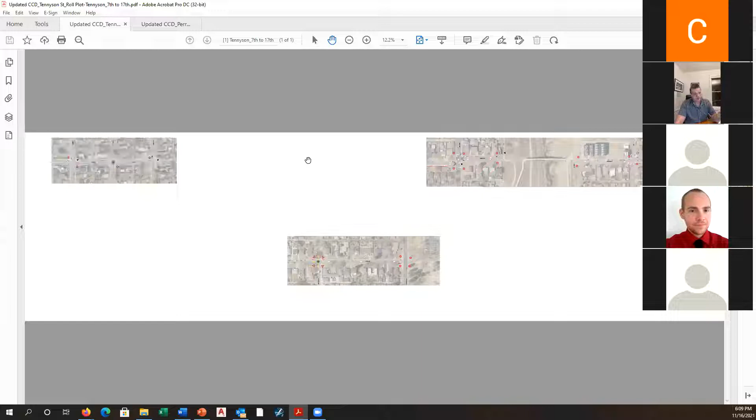Okay, good. So what I'm pulling up here, this PDF takes a little while to render, but this is what we call a roll plot. So this will show at this level the whole corridor all the way from 7th all the way up. It's a little confusing at this level, but I'm going to zoom in and maybe start at 7th and work our way up.

You'll see these also on the Konveio site, you'll see this exact information, these exact files.

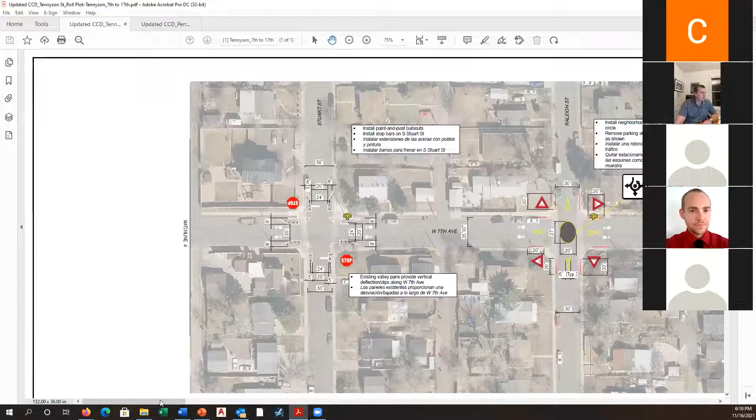So what you're looking at here is 7th Avenue, between Perry and Tennyson, Stuart, Raleigh, and Quitman. This is the neighborhood bikeway piece that we talked about in the presentation, showing how we're intending to make speeds go slower. We have a neighborhood traffic circle shown being installed at Raleigh.

We have paint and post bulb outs, that's what you're seeing with these. Those little black dots are the vertical posts. And we also have, if you've ever driven this, what we call valley pans, the drainage items at the intersections, which are also kind of steep. We think that provides slowing too.

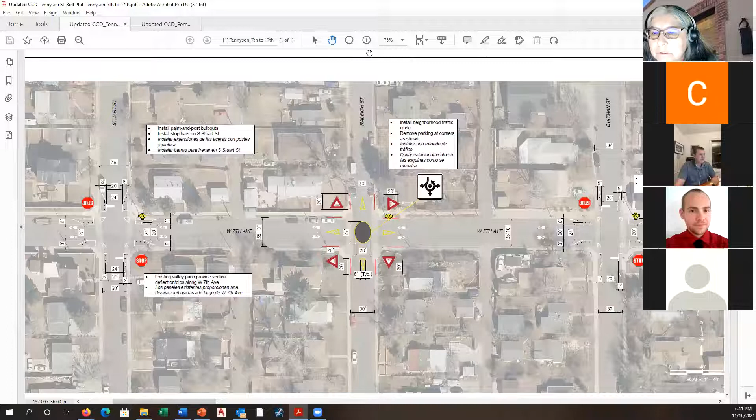Mrs. Sandoval, I see your hand up. Yeah, thanks. I was looking at that 7th and Raleigh where I'm located at, and I was wondering how large is that roundabout and what does it look like? I mean, you only have sort of the drawing on the right.

Konveio, the online Konveio, right. So I don't know what that means. It looks like a pretty good chunk of the intersection would be taken up. So what happens next?

I'll give you a high level answer. So we show the dimensions here, how wide and long those are, and the street dimensions. Those dimensions are set based on some engineering design guidance about how to slow speeds while still allowing Denver fire trucks and single unit trucks to make these turns. So from looking from the air down, that's how those are set up so that cars have to slow down, but Denver fire can still make those movements.

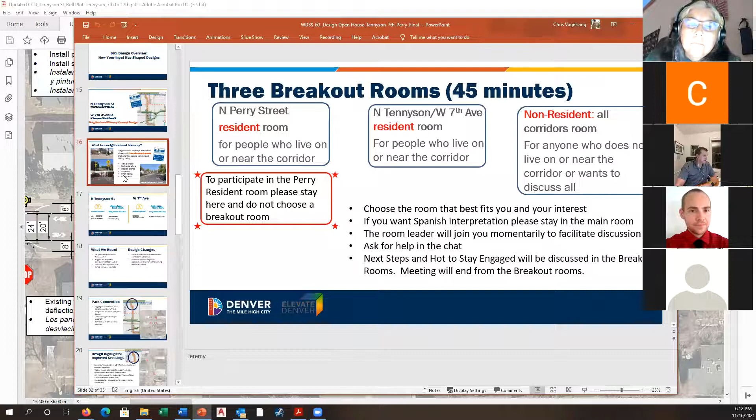And in terms of what it looks like, I think back in our presentation there was a photo. So I'll just pull this up. Right here, you can kind of see how they've been implemented so far. They're really like striping, and then these black, rubberized curb items with some signing in the middle. That's how it's been implemented so far, and that would be what we'd expect.

Are there any opportunities for any kind of landscaping features? Great question, some cities have done that. The issue in Denver is we don't get a ton of rain, and so that's a maintenance issue. I think the intent is to start with the basic traffic circle elements, make sure they work, that they're accepted by the neighbors, that there aren't any issues. Then the next step would be, can we make these more permanent? Can we do different things? That would be when the landscaping piece would come into play, Kathy.

I have seen them in other suburbs with the same amount of rain that we get here, so I was just curious. Yeah, great. And the other thing I wanted to bring up, we're talking about a phased implementation. One of the points of this program is to get a lot of things done quickly and less expensively, and then see how they work, adapt and adjust, and then make them more permanent, like more concrete items at a later date.

So I just had one more follow-up question. Also, I noticed on 7th and Raleigh where the fire hydrant is, there are people parking adjacent to it, and I gather that the red lines are to be not-parking areas. That's correct. And already where this red car is, I'm already crimped down from the sight triangle, and this is just adding to it. So I'm wondering if that can be shortened in any way so that we have parking.

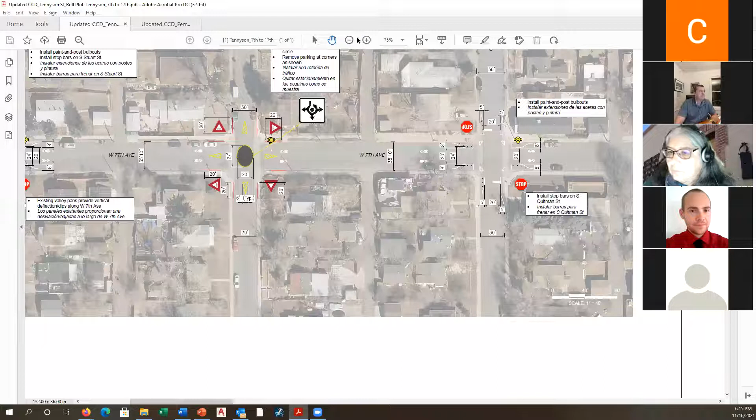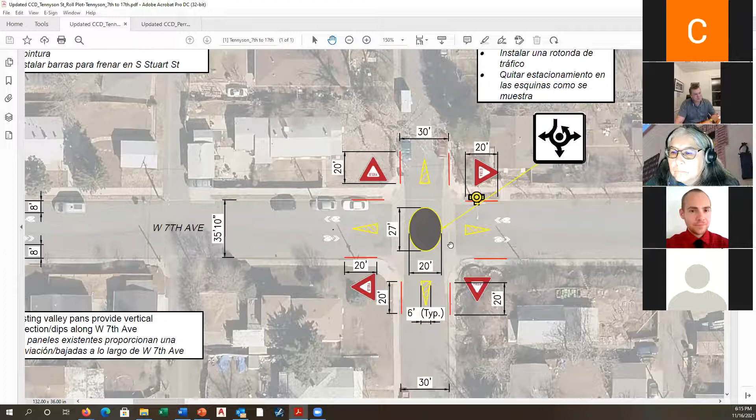Since those are pretty aggressive, I can only imagine how that would feel in a car, making those sharp turns and dipping into those valley pans, dipping out of them to try to make a turn, especially a left-hand turn. Yeah, that's a great point. So it's a lot of adverse slope, right? You're changing slope as you go across. I honestly don't know if the design team that's taking this has thought of that. We'll make the comment about that and make sure that gets paid attention to and make sure that works. Okay, cool. Thank you for pointing that out.

I saw a car just this morning, two of them back to back, throwing sparks through those valley pans. Oh, really? Yeah, so it happens. They're pretty deep. Yeah, they are deep, which is good for slowing speeds and kind of bad for hitting the bottom of your car, right?

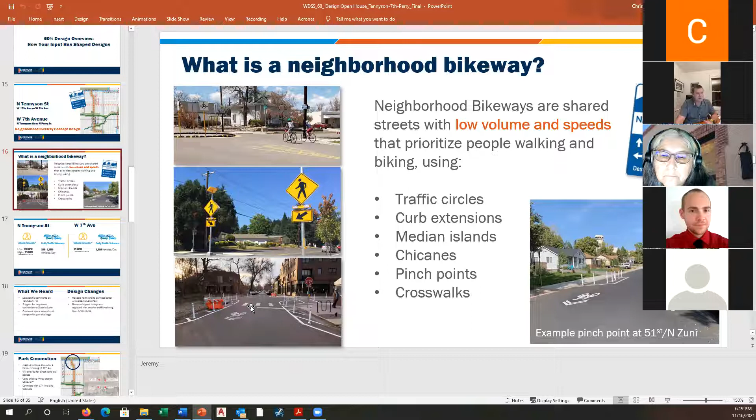Continuing with that theme, there is parking on the west side of Perry Street. We have a 30-foot curb to curb width - that's from face of curb to face of curb. Right now there is parking allowed on the west side of Perry. But in this design, to make everything fit, parking is removed along Perry between 7th and 6th. It's not impacted north of 7th - everything stays how it is today.

Have you received any comments about that from the residents? No, we didn't get a ton of comments about that in the last round. We'll try to make sure the Perry main room folks are talking about all this stuff too, and hopefully residents who live here will give input.

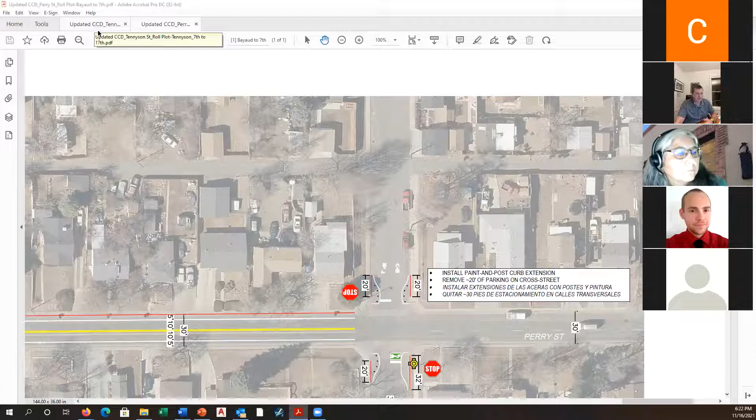Please, I think that's one of the main things I want to get across to people - please go there and take a look in the details. The comments you're giving me right now are really good, they're super detailed. That's exactly what we're looking for.

So I'm going to start moving north and start talking about Tennyson, starting at 7th and Tennyson. Sorry about that - so again, on your screen, north is to the right. So all the light rail and everything is on the right edge, heading to the right, and 6th Avenue is to the left. So sometimes I can get disoriented.

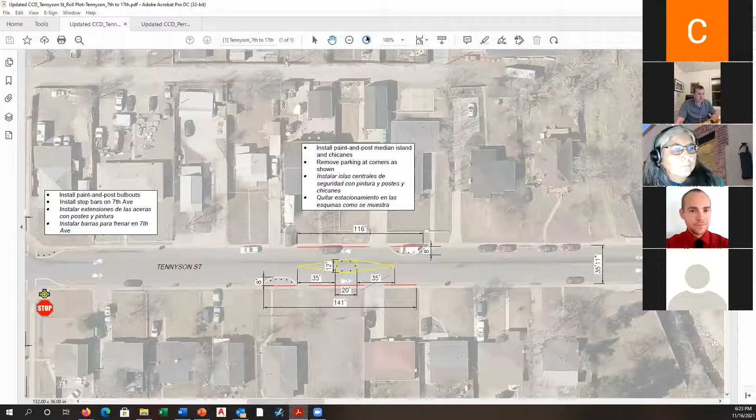On Tennyson Street, we had speeds that were a little higher than we'd like. We're trying to get those speeds down, so we've implemented traffic calming measures called chicanes. I'm going to zoom in so you can see. To Kathy's point before, the red lines show where parking would be prohibited. There are pieces of Tennyson where parking is removed to install these traffic calming elements, so cars have to make an S maneuver, or a C, which slows their speeds down.

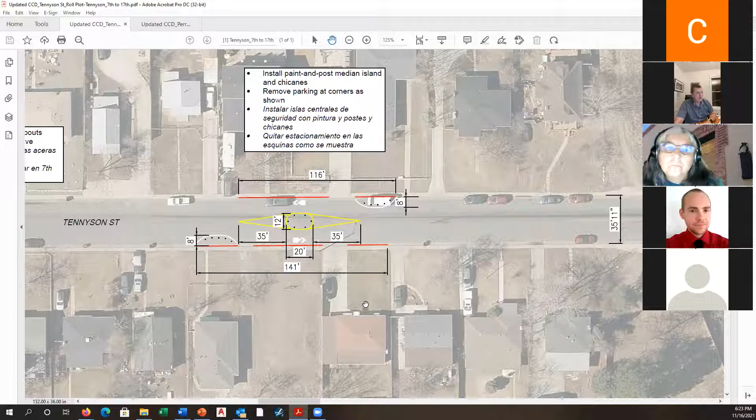We were proposing to install a few of these. This is one of the locations, and we tried to set them up so they wouldn't block driveways - so we wouldn't have the medians in front of driveways and the chicane elements. As people go and look through those, please give us any detailed comments if we've missed something there.

At the Lakewood Gulch Trail crossing, there's a crossing where the trail goes across today, but there aren't any markings or anything. So we're proposing a paint-and-post median island, marked crosswalk, and yield lines to really define that space and make that crossing safer.

Oh, I'm sorry - hey, by the way, if I don't see you, just go ahead and speak up, Jonathan. Sorry. I only raised my hand like 3 seconds before you called on me. Okay, alright, so it wasn't a wait.

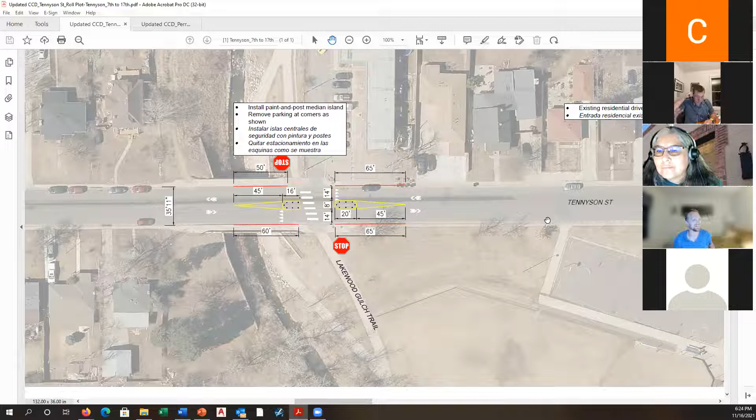Hey, just wanted to say these chicanes are great, I'd love to see this kind of work here. I'm wondering - this relates to my comment on the last one too about the traffic circle - I'm now interpreting that the little black dots on the screen represent some sort of vertical element, like a flex post, something along those lines. Yeah, that's right.

Wondering about these chicanes, and particularly the traffic circles on the other one - I didn't realize until we walked through one of those diagrams that the traffic circle painted triangles don't include any flex posts. What I'm seeing on these chicanes is only flex posts in the center circle instead of anything nearer to the points of the chicane.

What we're seeing on the 35th Avenue bikeway is that just the paint on the ground in the approach to the traffic circles is not changing any vehicular behavior as to how they approach and enter it. They'll stay mid-road and take a wider turn. Wondering if we could add some flex posts to those incoming triangles for the traffic circle, and maybe some flex posts nearer to the points of these chicanes, so that people don't just blow over the part that's supposed to be the narrowing effect.

Okay, yeah, great comment. Sounds like you guys have had some recent experience watching operations of ones you've installed. So yeah, we'll take that comment down and take a look at that.

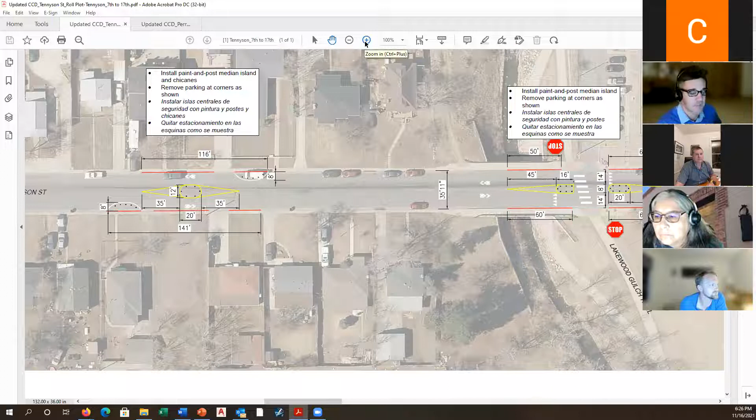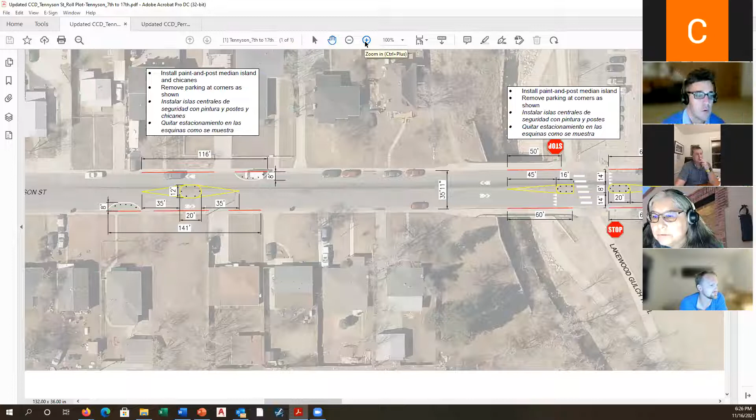And Chris, one quick thing. Sure, Jeremy, again great comment. I think it really does come down to discussion and coordination with Denver Fire, making sure that if this is a prioritized route for one of their stations, they can actually physically get through and aren't popping off the flex posts every time. But something we can definitely explore and look at the geometry. Good comment - this is one of the few through streets that go across the gulch, Tennyson and Perry, so it's important to have those clear.

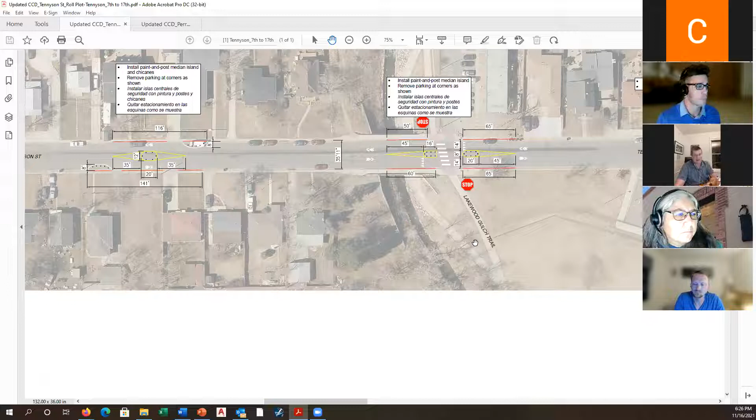Yeah, across Lakewood, the Gulch, yes. Okay, that's a great point, Jeremy. We are coordinating with Denver Fire. That was a comment we had at the last meeting about making sure response times weren't impacted and that they could get where they need to go to save lives. So definitely on board with that.

Okay, so I'll just kind of keep going north. So at this intersection, this is set up this way with all-way stops today and marked crosswalks.

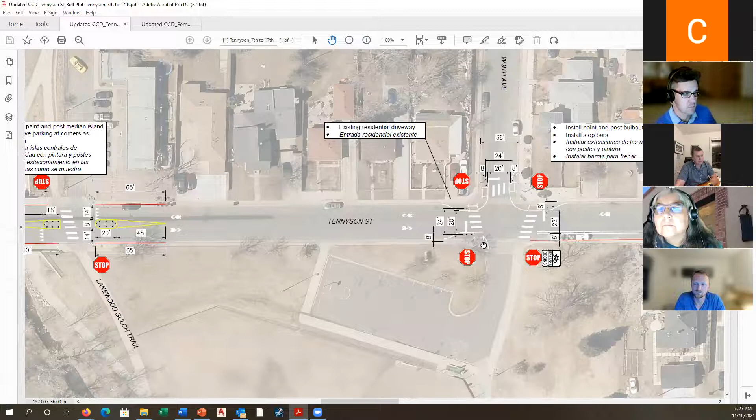We are proposing to do curb bulb outs. You'll see that, to Jonathan's point before about the raised - the black dots representing raised posts - when you look at some of these, they won't have the black dots in certain places. That's not a rendering error or a mistake, that's on purpose. The design team is running - they look at, in the computer, Denver Fire vehicles and certain vehicles like that, and make sure they can make the turn without hitting the posts. If they can't make the turn, then the posts get removed, but the striping stays in place.

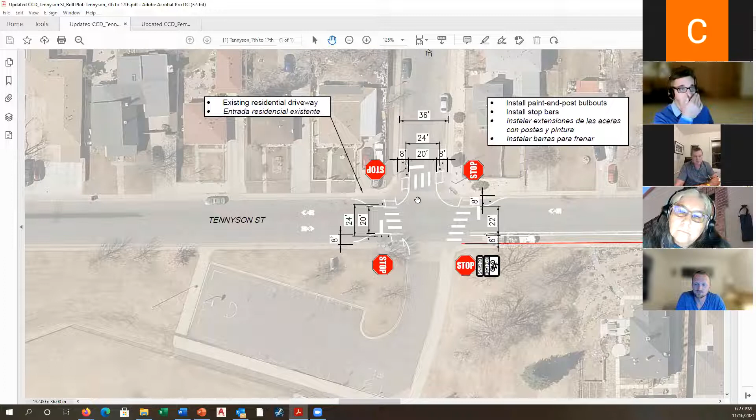So kind of to Jeremy's point last time, they're looking at that level of detail at each intersection.

Okay, now here is this intersection - go ahead. At this intersection, I have a concern about the stop signs for going north and south. From experience living in this neighborhood, any bicycles that go down that hill blow through that intersection. I'm concerned if traffic on 9th is expecting a vehicle to stop, there might be an issue with that bicycle coming through the intersection. If we were to remove the north and south facing stop signs, at least it'd be the expectation that anything coming down 9th would look first.

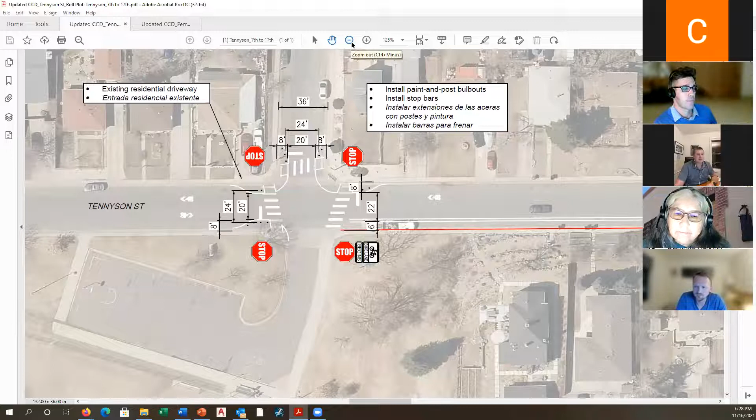Okay, I disagree - yeah, I think Kathy... it needs to have a stop sign. Man, that's a really steep grade, and if people don't stop there, they're just going to continue to go faster without a stop sign. At least it helps break the speed up a bit, and I think that's real important.

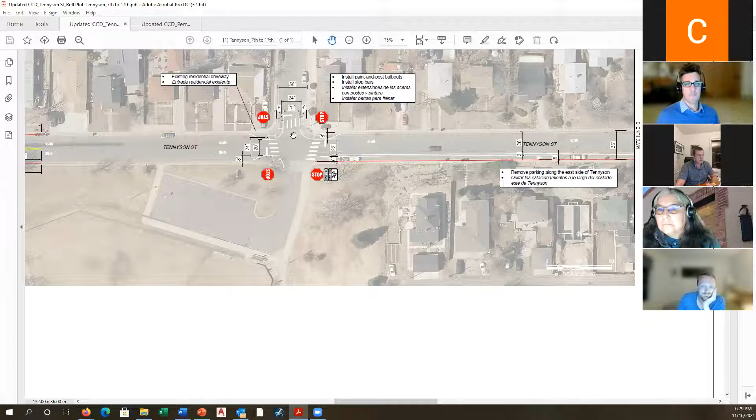Right, so I get that in terms of the bikes blowing through that - I'm sure they do because they don't want to slow down going downhill. But to Kathy's point, the reason this was implemented the way it is now is Denver's Safe Routes to School program, and they do all-way stops and marked crosswalks at those places. So that's the reason it's there, and we're trying to make it a little more obvious that you have to stop there by putting the curb bulb outs in and doing some things.

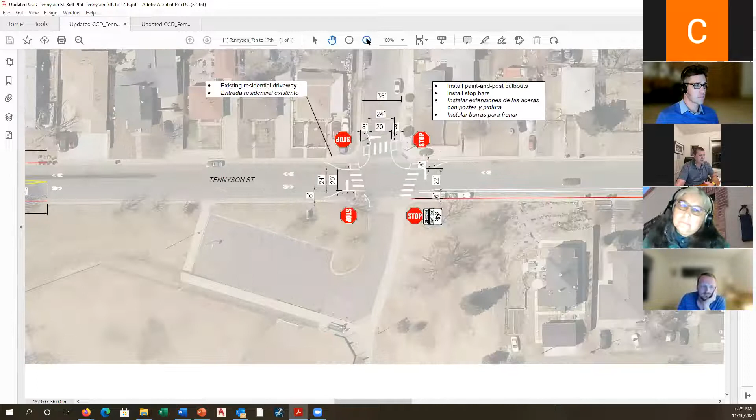But we'll take another look. Kathy, I think you make a great point - that's why it was designed the way it is today.

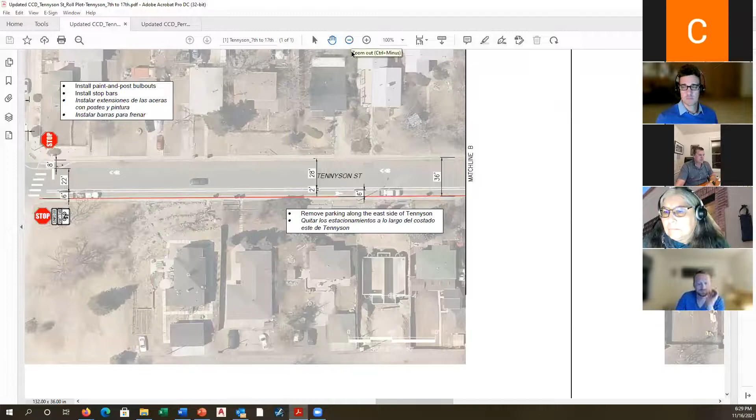This part I really want to highlight. I'm going to zoom out a little bit so we can see the extent of it. Geneva mentioned it in the presentation, and I'll go over the northern half of this. But basically, we looked at the speeds here and the grades, so you can't really tell.

You can't tell from the aerial, but where my hand is now is low, and this goes uphill to the north, and it gets really high. This is really steep. I think when I go downhill on this on my bike, I hit like 30. I go pretty fast.

What people were worried about is going uphill, when you're going up you're going like 8, 9, or 10 miles an hour, and they're worried about car interactions and speed. So we looked at this, looked at the topography, looked at the data, and changed this design to include an uphill bicycle lane heading north towards the light rail.

What that means is that parking on the east side of the street would all be removed. So we did do some parking studies here. I think 30% of these spaces were utilized, so it wasn't like zero. So there will be some impacts there.

If you're on this call and live on the block between 9th and 10th, I'd love to hear your thoughts on that. Is there anyone here? Okay, well, we'll make sure we reach out to folks and try to get folks that live on this block so they know what we're proposing and what's coming, because we don't want people to be surprised.

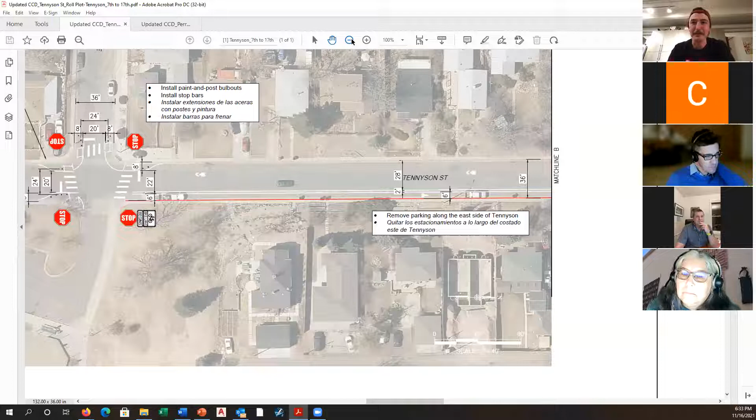Yes, good point. Andrew? I just want to say I love it. I'm really grateful. I oftentimes get off my bike and walk at times on really steep hills if I get nervous about cars, and I always feel really embarrassed, like I don't want to go do that same route again because I've held up somebody. So I'm really glad to be able to go up this street and not hold anybody up by going really slowly on my bike. I was just really grateful to see this change and wanted to say big heart love on that change.

Thanks for the input, Andrew. So yeah, if you live on the street, you might not be as excited about it. If you use it, definitely it's an improvement.

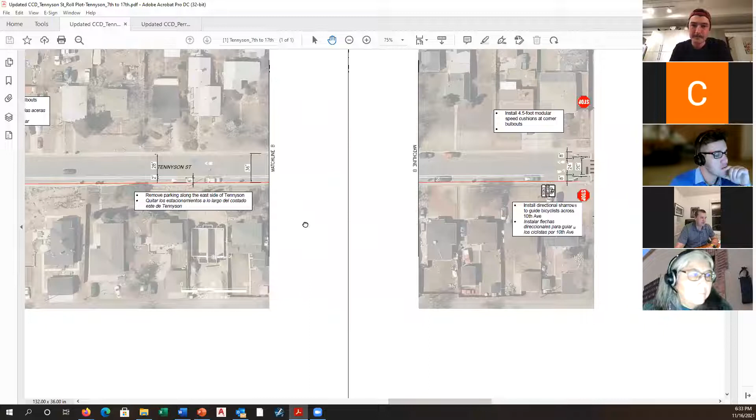I'm gonna go, we just have these kind of broken because of the way we wanted to show them on the internet, but I'm gonna go up a little further and hopefully this will load up. There we go. Okay, so that little line was kind of half the block. This is the north half of that same uphill climbing bike lane, and this is the intersection with 10th.

Some changes here to try to get speeds down, get the turning speeds down, make this safer for pedestrians and a little easier for the bikes to make these sort of offset intersection moves. I'll zoom in a little, I see people kind of squinting there.

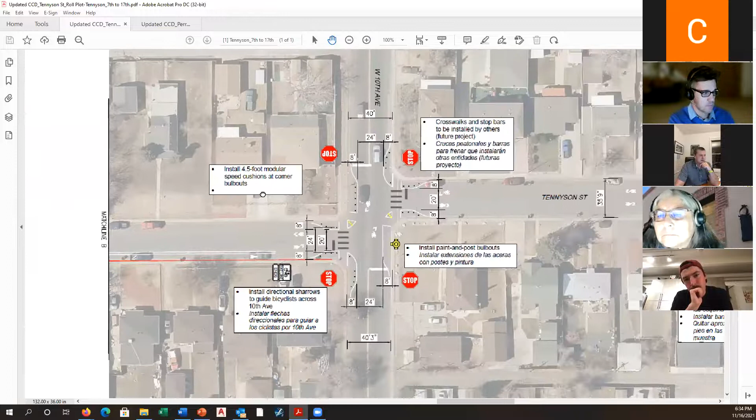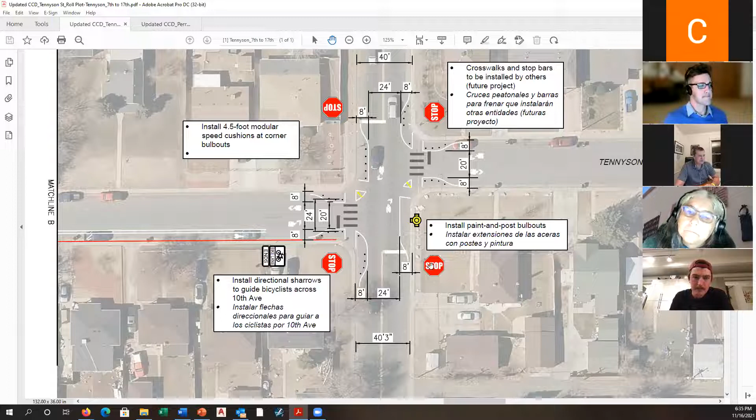Another thing I wanted to point out, these little yellow areas are called corner cushions. Imagine a mini raised speed hump in the corner that tries to keep drivers from cutting that corner faster, making it a little uncomfortable, so they follow the path and speeds we want them to turn at. The black items are raised elements, and then we have the all-way stop condition.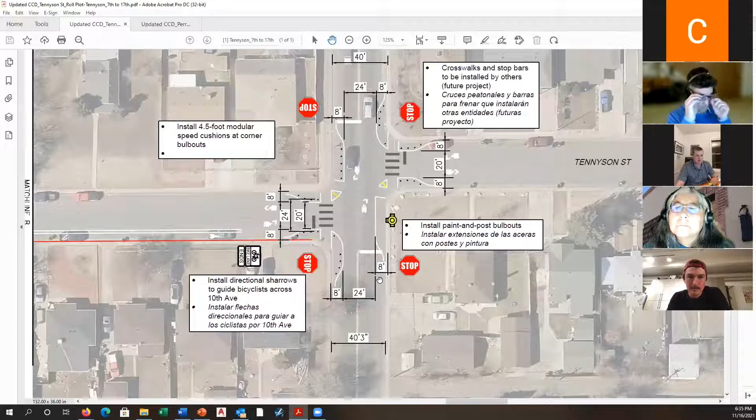There's a note about a future project. Is this the NTMP? I thought this was an intersection flag for that. Yeah Andrew, that's right, you've been involved in other processes. It's the Neighborhood Traffic Management Program, NTMP, and they've looked at some of these areas too, 10th being one of them. The crosswalk bars shown in gray, they'll come through and install those, and the things in white are what this project will go do. So it's just a minor difference.

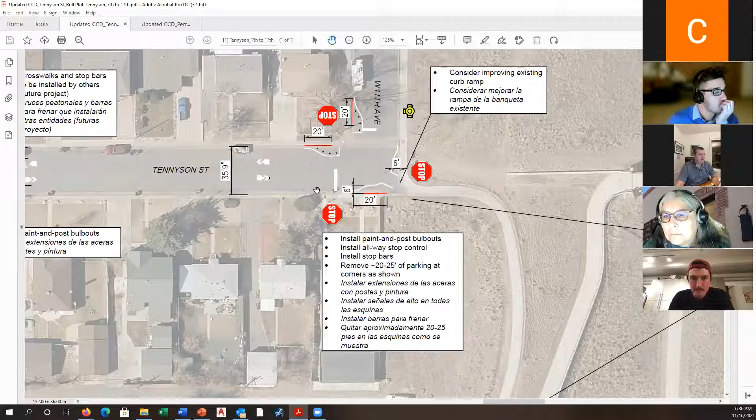Okay, I'm going to keep going north. Now we're on that little leg of Tennyson that connects to 11th, trying to get to the path across the gulch on the bridge. A couple changes here: because of the way the bikes work, we're making this an all-way stop, with stop bars, paint-and-post bulbouts, all that. We're also considering improving this ramp - if you get out there, you'll notice it catches a lot of debris and dirt, so we're looking at making the drainage work better so it doesn't trap things.

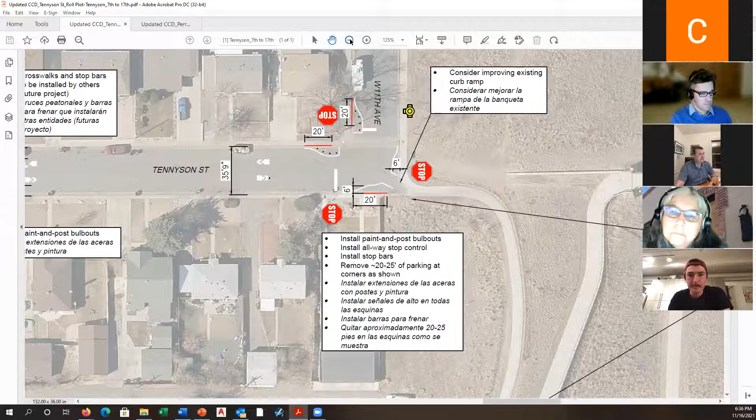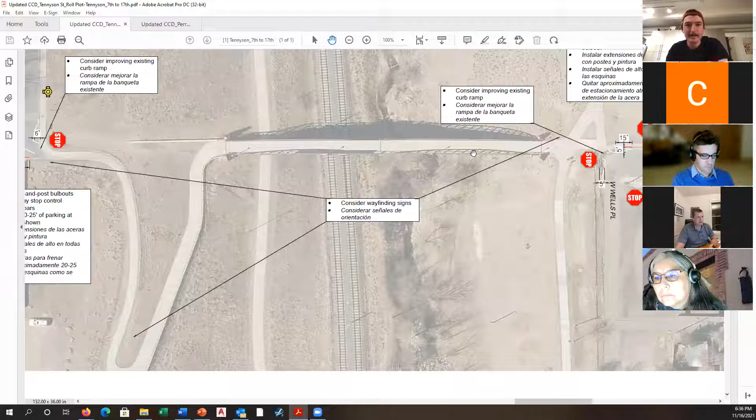Let me zoom out so we get a better picture. Now on the path, we end up over the rail and over the gulch. On the south side of the bridge, right as it comes off and makes that left-hand turn, there's a lot of gravel that piles up there. If I'm biking there, I have to slow down quite a bit so I don't crash. I think people use this too, since going around isn't something people want to do. The water runs downhill here and brings debris. That's a great point, we should note that and see if there's something we can do to make that better.

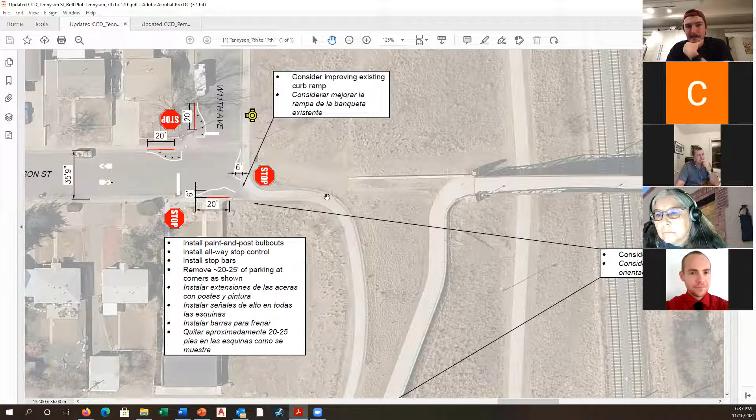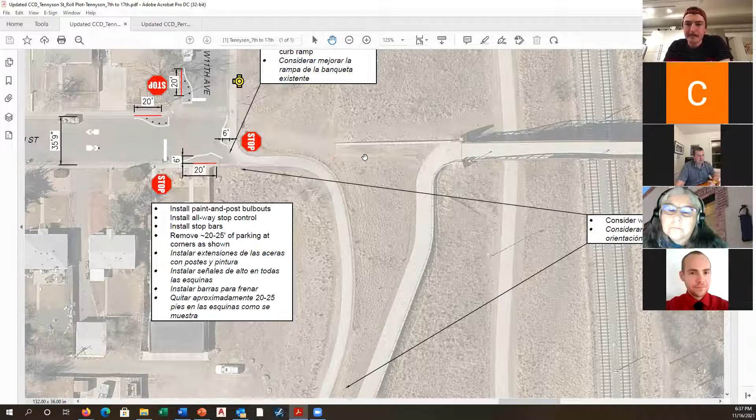One thought there would be stairs. Pedestrians are going to take that straight line, and that's what's causing the erosion, all the damage to the soil. When I'm walking, I actually take a little raised wall and walk on top of it so I don't touch any of the soil. Yeah, so we'll make a note of maybe something we can do to keep the debris off, but the better solution would be to harden this and make stairs work for pedestrians so they don't have to go all the way around.

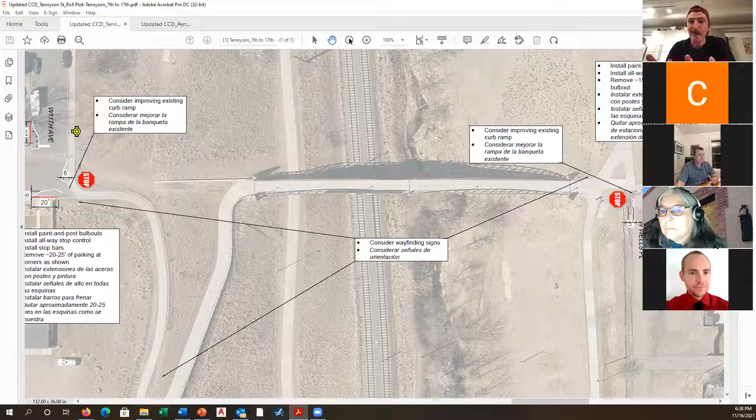I love a lot of this, but this is where I get a little concerned, because my safe bike to work is along the bridge and then down east on the gulch, and people walk their dogs, people are biking every which way. I think it's comfortable right now, but I'm excited by the challenge that there might be more bikes than the bridge can handle in the future depending on the time of day. Near where I live, I encountered a big procession going on across the bridge not long ago - I felt really bad, I had to brake really hard. It's a surprisingly narrow bridge, considering how fast the routes around it let you go.

I think in the future, like 10 years from now, if this is super successful - I know that's very outside the scope - but if it's very successful and a lot of people start to bike because it's much safer, it feels like we could hit a capacity issue with how small that bridge is for both pedestrians and cyclists.

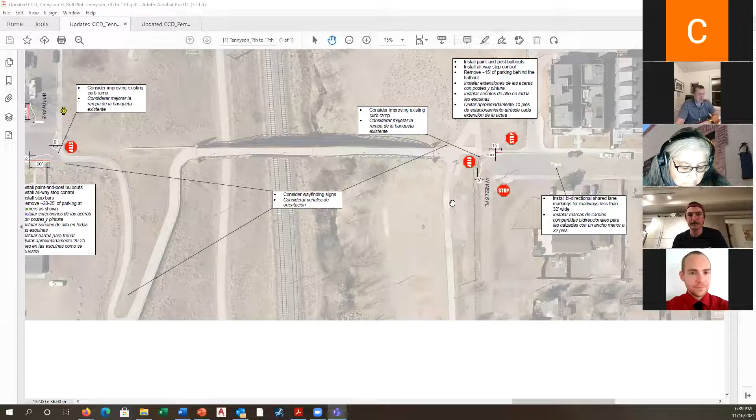So now we're on the north side, and we're into a different kind of street system, getting closer to Colfax. Everything gets a little different here. So here we go.

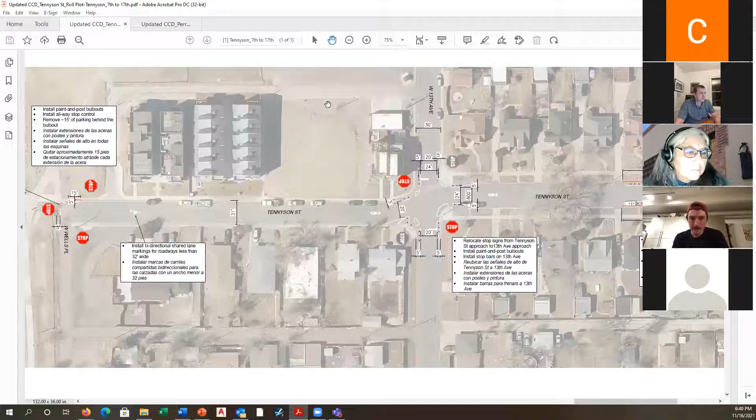So we're proposing here, let me zoom in a little bit, there's a couple things I want to point out. We had speed cushions in the concept you saw before, and like Geneva said, the speed cushions were sort of being piloted, and Denver Fire isn't sure they're super happy with those yet and how they work. So we're working together to try to partner, but we're showing raised islands and kind of chicane treatments in this place.

Jonathan, do I see your hand raised? Yeah, hey, just wanted to ask a clarifying question on the speed humps thing. I know a few years ago we were told it's not possible to install speed humps in Denver because they weren't part of our approved tool set.

They then became approved as part of the complete streets approval, with these guidelines, and in fact became a recommended treatment for many of these roads. Given that that's now the published rules, why are we backing off that, particularly given that we've shown speed humps are fine for fire trucks all around the nation? It's getting frustrating that we keep being told we can't have speed humps when it says in our rules that we can.

Yeah, it's totally frustrating. I think the complete streets guidelines got approved and passed, and then Denver Fire was having not second thoughts, but they were worried about rolling out a thousand of them across the city right away. They were advocating for a measured process to start doing them, to make sure they're comfortable. I understand what you're saying, they're installed in other jurisdictions and their fire departments do fine with them. That's kind of where things stand in terms of how Denver Department of Transportation and Infrastructure and Denver Fire are working together to try to move the ball on that.

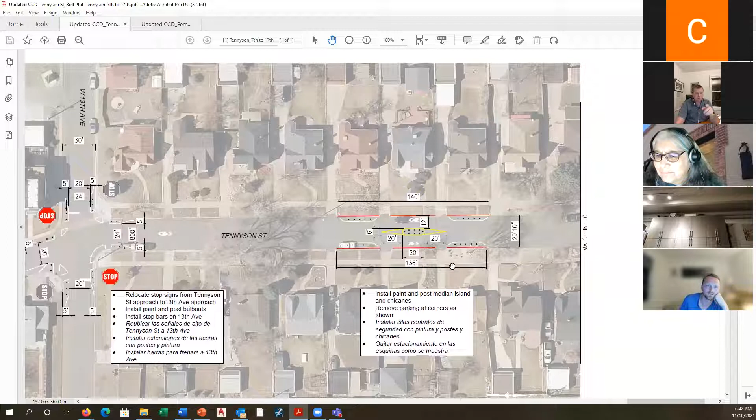So, to Jonathan and to Kathy's question: the chicanes, like these median islands with the chicane elements, they are much longer, right? The speed cushion is kind of a short point, maybe 8 feet long. And actually in our design standards now, the speed cushions allow parking, so there aren't as many parking impacts. What we're hoping is that, to Jonathan's point, we start to get to do more of these, because we think they're pretty effective and have less impact to the community. But these are the tools we have available at this time, so that's why we've shown this.

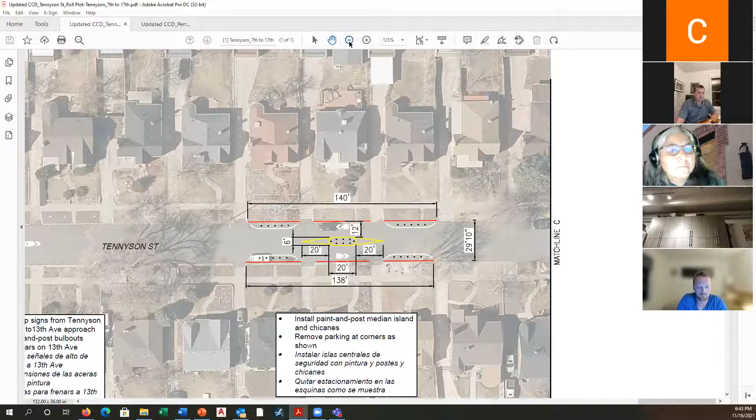Okay, yeah, I know that's not what everybody wants to hear, but that's the reality of trying to implement this in the next year. Okay, so now I'm going to keep going and get up to, hopefully...

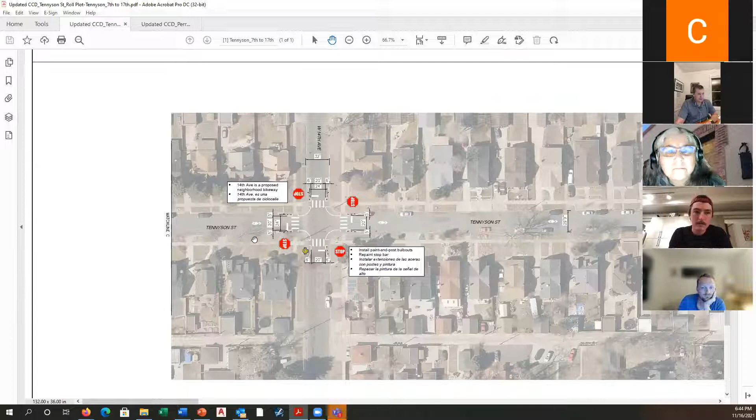Okay, so where I've set us now, 13th is just over where my hand is, and we're heading north still towards Colfax.

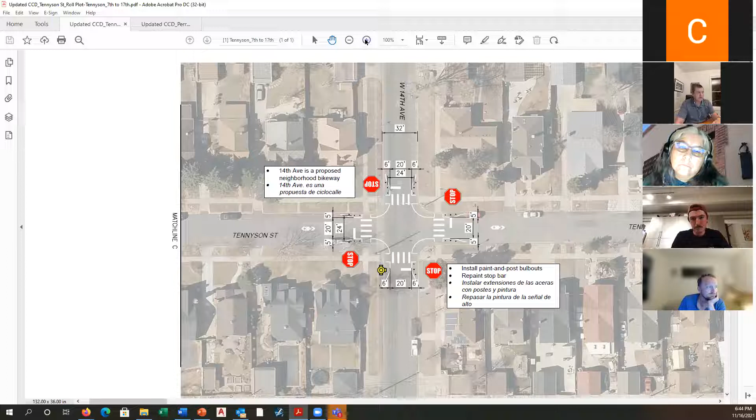Let me point out a few elements here. This is 14th. This came up in our previous meeting and some meetings with the RNOs. 14th is a proposed neighborhood bikeway as well. We originally had a design here that showed a diverter and other elements, a heavier treatment. As we went through comments and looked at the pros and cons, what we settled back with was an all-way stop with curb extensions as the design treatment we're including right now. I wanted everybody to see that, and if there are folks on the call who were part of that discussion before, I'd love to hear your thoughts or reaction.

I was on all of these calls, and almost all the discussion I heard was people being annoyed that the diverter was being removed, and complaining that the 14th Avenue strip has been identified as a bikeway in plans for over a decade without a funded project. So people were pretty enthused that we were at least getting the diverter here. I'm still not sure why the diverter's been removed, given we have constant drunk driving and high-speed accidents and crashes on this road as people try to race around Colfax.

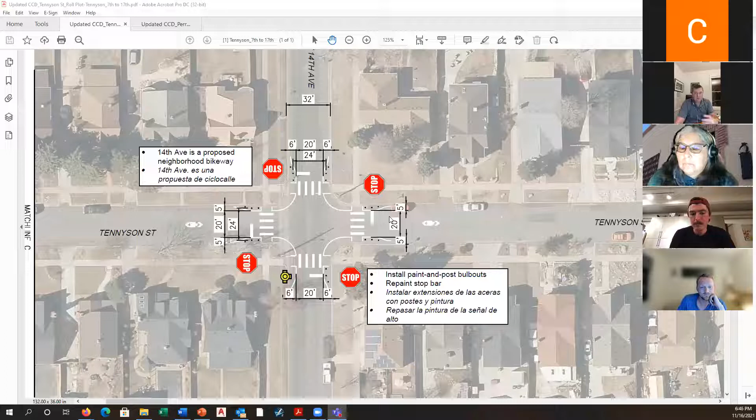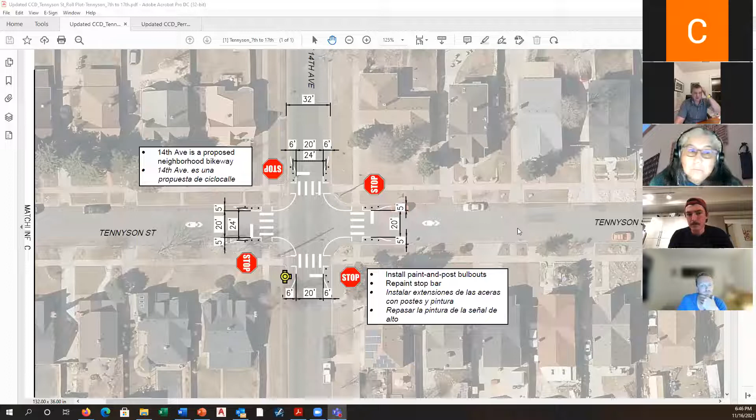Yeah, Jonathan, that definitely came up in all our previous discussions. I think we're going to have to circle back again, connect with the designers and DOTI, and get more specific info on why exactly. So that's where we were—not necessarily what we were told, but what we heard from folks. Some people were concerned about the diverter, some really wanted it. We chose consistent treatments with the idea that when 14th is installed—and I understand it's been on the books for 10 years, though it's not in the early implementation program right now—that would be a time when we'd relook at it. So that's how I understand it. But if you give us that comment, we'll write it down and try to get some better answers.

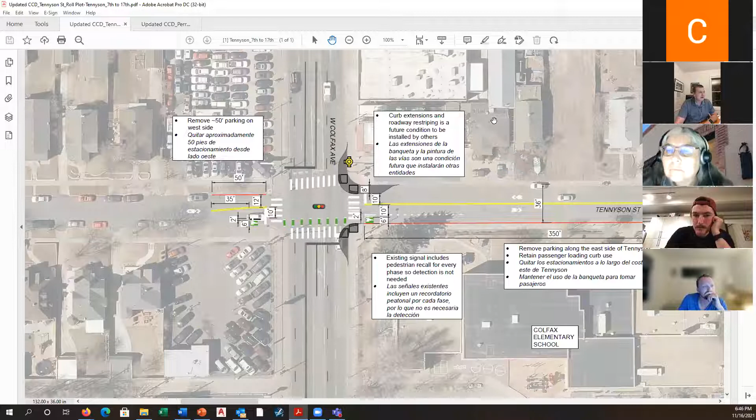Okay, I'm going to keep moving up towards Colfax. We showed a little of this before—this is Colfax Elementary, and hopefully Leah's still here, great. Let me zoom in a little. So what we tried to do here, since we're crossing the intersection, is we didn't have enough room to do bike lanes on both sides, so we picked the northbound side, and on the southbound side we have a shared roadway condition.

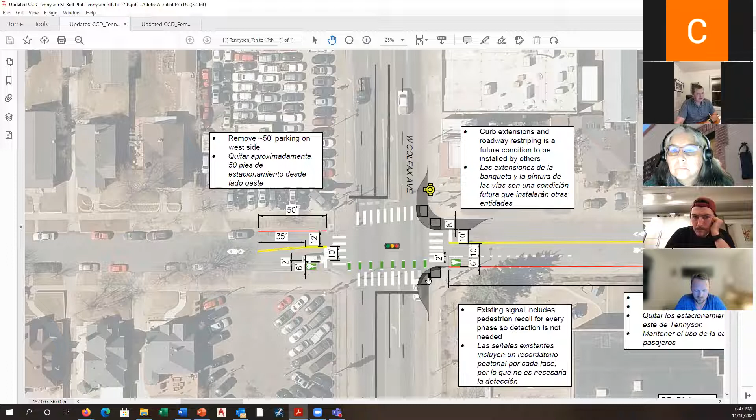It's a trade-off, tied in with the Colfax pedestrian project improvements and the bulb-outs being put in there. Along Colfax Elementary, the idea is we're going to remove on-street parking but retain passenger loading curb use. We met with the school and got input about how important this is for pickup and drop-off—folks come around Colfax, take a right, and stack up here. What we're trying to do is let that activity still occur while allowing bikes to get across the intersection and then take the street.

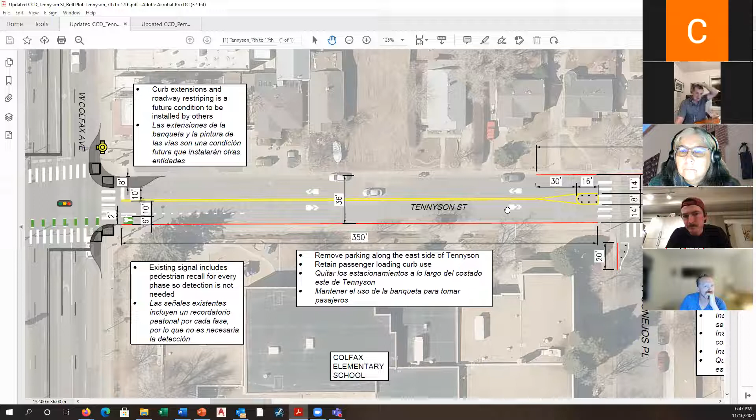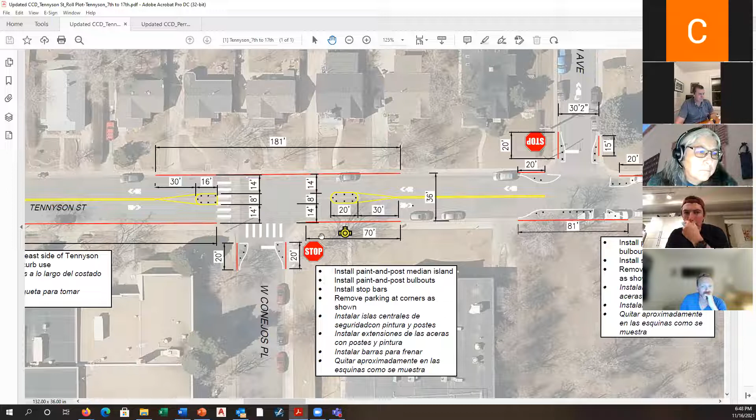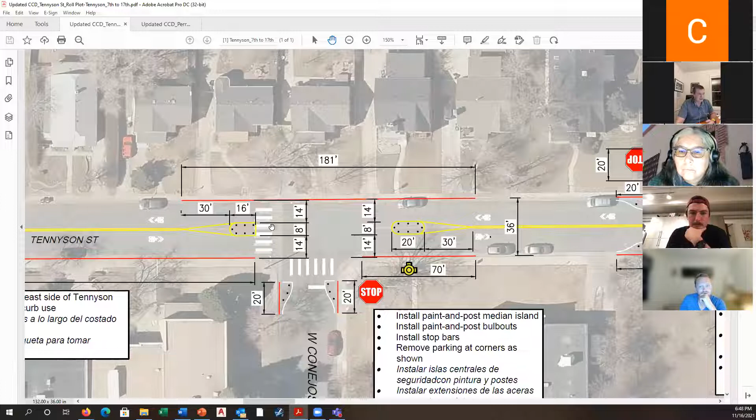Most times of day there wouldn't be cars here, it's just for loading. We also mentioned these median islands at Conejos, right at the corner of the two schools, to try to make this pedestrian crossing safer. The reason there's not a crosswalk shown here has to do with the curb ramps—there's a driveway here, a driveway here, a curb ramp here, but no receiving curb ramp over there. Our program doesn't have money for curb ramp improvements, so we aren't showing that crossing today, but someday we would add that, and this would be a crossing as well.

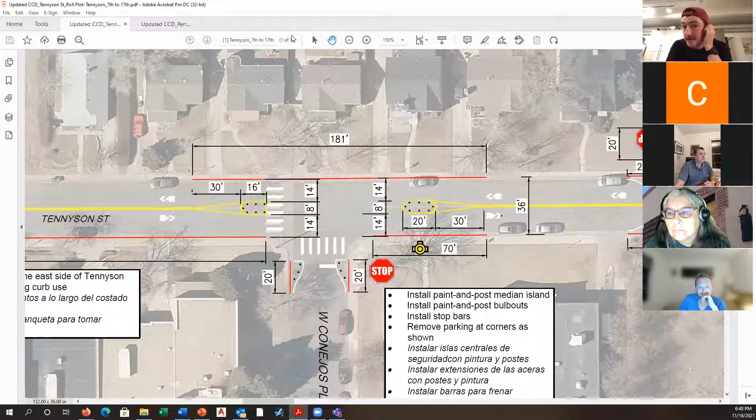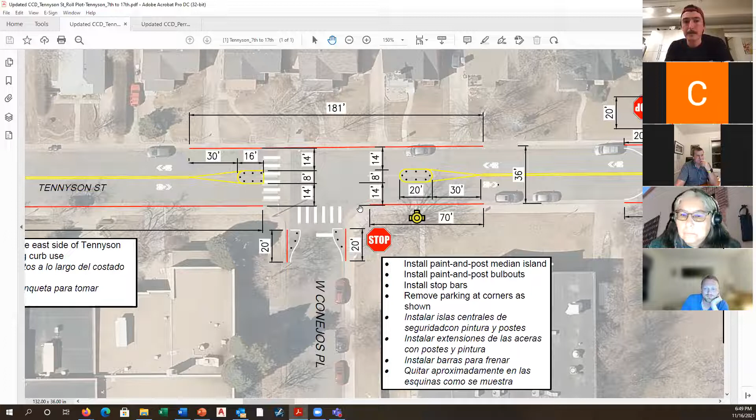Andrew: Just a quick comment—it's a surprisingly busy pedestrian intersection all the time at Conejos and Tennyson, because new folks are walking to the new attractions in the area, and folks who've lived there a while are walking through to visit friends and family on given nights of the week. At some point I think it should definitely be a priority to make that a safer crosswalk for people. It's not a high traffic street, frankly, but people do cross it all the time—Conejos down past Tennyson all the way to like Raleigh and Perry is really, really utilized.

Understood, Andrew. Yeah, we definitely want a marked crosswalk here, but we aren't allowed to do that without that receiving curb ramp. So we'll put that in the list of improvements we'd like to make.

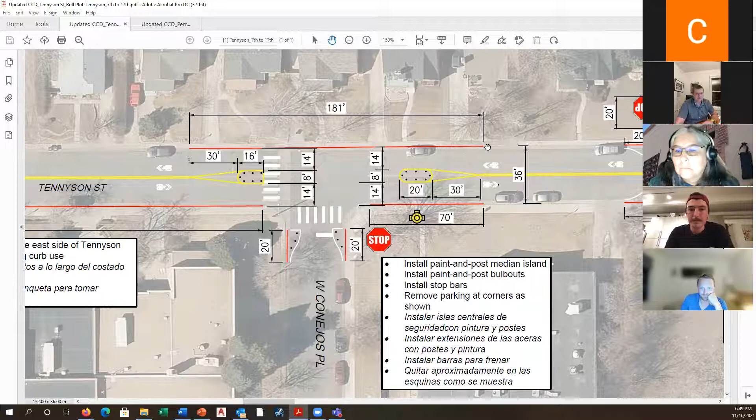Okay, let's see here. Great. I'll just keep going a little bit. I want to show you a change here. So we keep going

north. Bulb outs and curb extensions. And then when we get to here, this gets a little confusing. Okay, great, sorry.

So when we get to 16th, that's the place where we change. And the reason we're changing the original alignment you all saw last time, let's see if this shows it. Let me pull up Google Maps and give you a sense of why we did this.

So now north is up, of course. There we go. Sorry if anybody got dizzy.

Okay, so before we came, we were just talking about the schools here, and we came straight up Tennyson to 17th. This intersection of 17th and Tennyson doesn't have stop signs for 17th, and doesn't have a good way to get into the park. We talked to Parks about trying to put maybe a path connection. That's on their list of things they'd like to do, but it's not something they're going to do immediately.

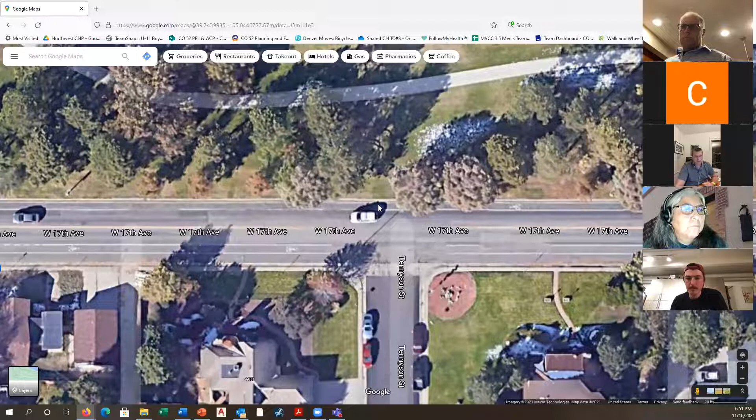We also talked with traffic operations about trying to make this an all-way stop. Both of those were bigger asks than we felt like we could achieve right now. So if you're a confident cyclist, you're welcome to keep going up Tennyson and access the 17th Avenue bikeway system. But for people who are less confident, we're going to sign them to come over on 16th and then up on Utica.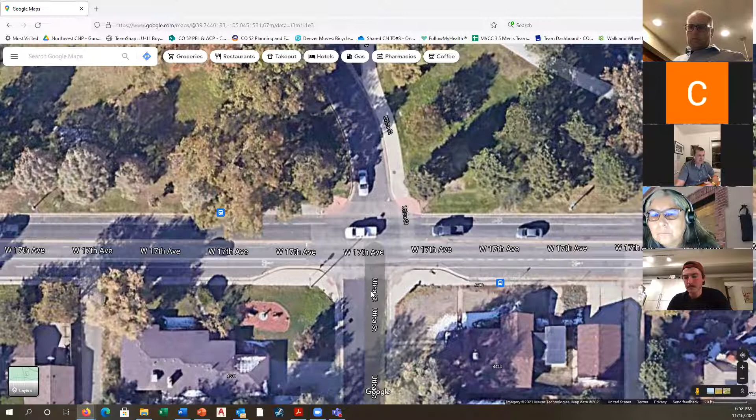And the reason for that really is about this intersection. We have a good connection to the park, to and from the park, and we have an all-way stop condition. So we felt like it was a much safer place to get the interested but concerned cyclists up and make that connection. I just wanted to show that about the why.

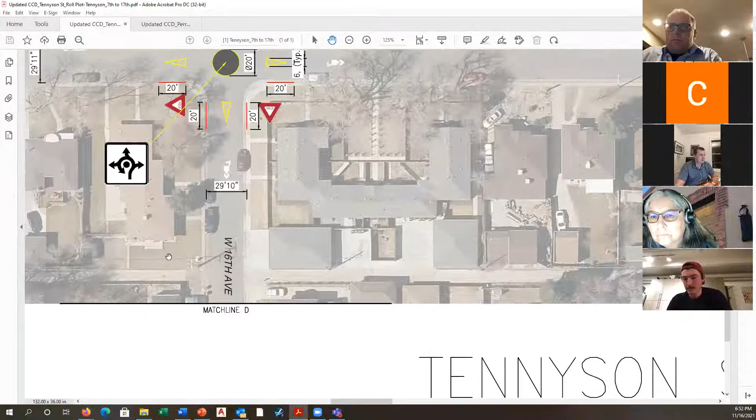And then I want to show the how. Okay, so this is again the schools here, Colfax Elementary, there's Conejos.

So if you're heading north, you would get to 16th Avenue. There'll be signing to tell you to take a left. So you'll take a left here. The volumes are pretty low and speeds are low, so we're not too concerned about that. Then you travel on 16th, and then I'm going to take you to this, sorry.

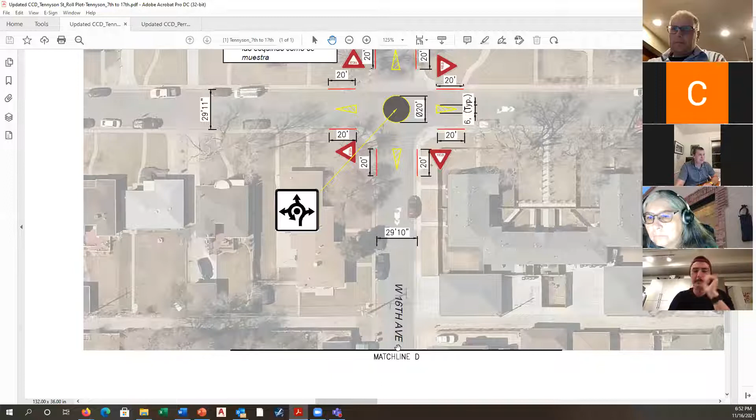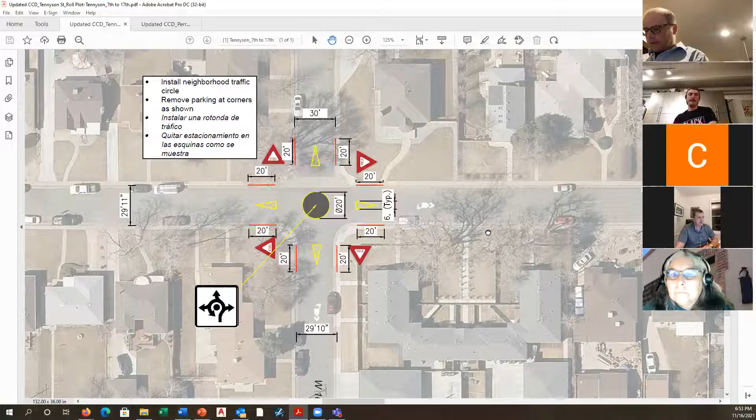So this is 16th, same kind of spot we were just at, right? So Tennyson is just down here at the bottom of your screen. You come up and this is the same, Kathy, that we talked about, the raised traffic circle here. Same kind of implementation, same kind of impacts at the corners, a little different dimensions because we have different street widths coming. And then bikes would turn right and then head up Utica and then access 17th and the park right here.

So I see some, do folks have their hands raised? I'm sorry. I do. Okay, great, go ahead.

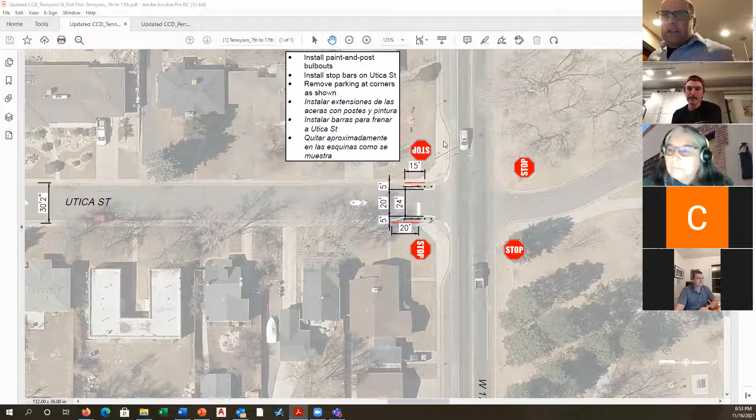Yeah, Chris, could you go back to 16th and Tennyson? Yeah, sure. I was wondering if you all had considered putting in a stop sign there to make it easier for kids to cross from the high school, that private high school there on the east side of the road, over to 16th Avenue, and also make it a little easier since it is still kind of a blind spot. Yeah, yeah.

We looked at that at a high level. I think that's something that we should look at a little more closely, Alan. So appreciate the comment. I think the way this works right now is the same kind of ramp situation. I believe that there's a curb ramp here to connect those together. So we'll take that under advisement and take a look at an all-way stop here to try to improve safety for crossing over to the schools. Thank you. Okay, thank you, Alan.

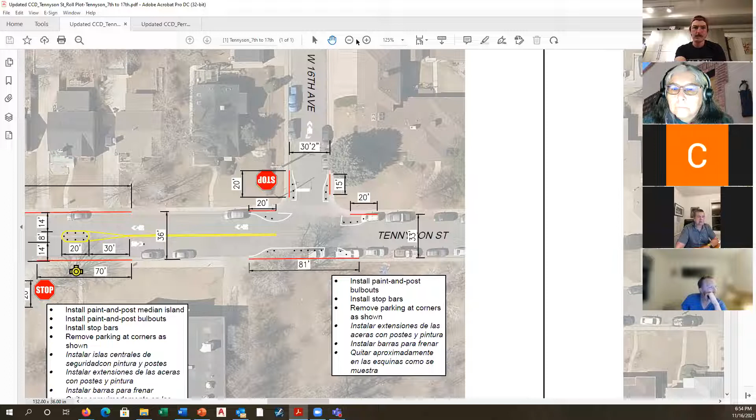Does someone else have their hand raised? Yeah, Chris, are you proposing bollards and painted posts right there at the corner of 16th and Tennyson?

Yeah, so let me kind of lead you through this again. The little black dots are raised posts, those flex posts. The white stuff is actual striping, and the red areas are where parking would be removed to daylight the intersection and make the visibility safer. And I mentioned before, if you see in here, there aren't black dots all the way to the corner. That's because of fire truck turning requirements we're looking at, where we don't want those raised elements that the fire trucks would have to run over to make that work.

So I answered the what is it? Did you have a follow-up? Yeah, well, I live right at that corner, and I just don't see the kind of traffic or the bike flow that everybody is talking about.

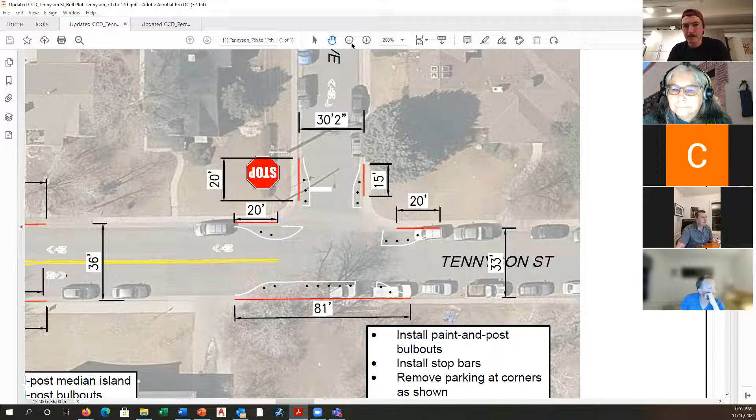Gotcha, so you're thinking that in this part of Tennyson the speeds are low and the volumes are low? Yeah, and the turnup 16th, to narrow that with those bollards right there, we just don't get that much traffic, and we just don't see that much bike traffic. Sorry to all the bikers out there, but I live there and I can see what goes on all the time. Got you, Gary, thanks for the input.

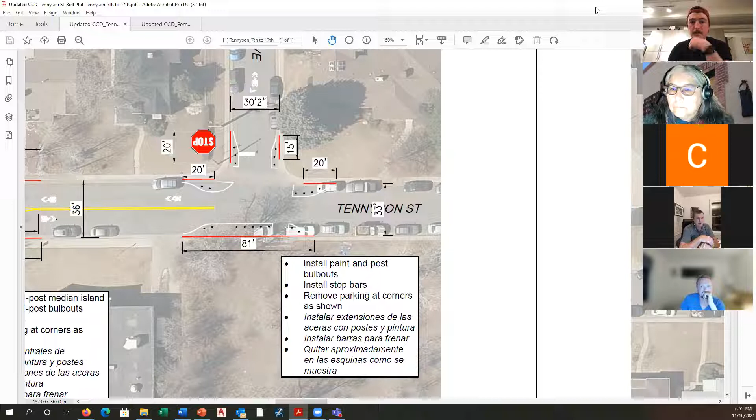I think what we're hoping is that we'll see more bikers, right? And I get that, you definitely don't see that many, definitely on 16th, right? Yeah, nobody would really bike there today. Probably see a few on Tennyson, not that many. And we're hoping to change that.

I think we'll take a look at that and take it under advisement. I think to Alan's point too, there are some pedestrian movements here that we want to make sure of, and these really help shorten those crossing distances. So I think it's a balance of what we want to do for safety, and then maybe what we need to do if the volumes and speeds are pretty low.

Okay, thanks for that. I know it's 6:56. I want to just open it up. So we just went through the corridor. I'm going to stop sharing my screen for a second so we can all see each other a little better. Is there anything anybody wants to chat about in general? Andrew, I saw you did this.

Yeah, just another real quick compliment. I'm just glad, I typically run up Utica, and then take a right on 16th with my dog. Because the sidewalks are small, I'll run in the street often. So I'm very glad to see a little bit of traffic calming done via the circle, and just wanted to make another positive comment. So thank you for that.

Thanks, Andrew. We have 3 minutes. I think if there's one more comment, Kathy, I see you have your hand raised.

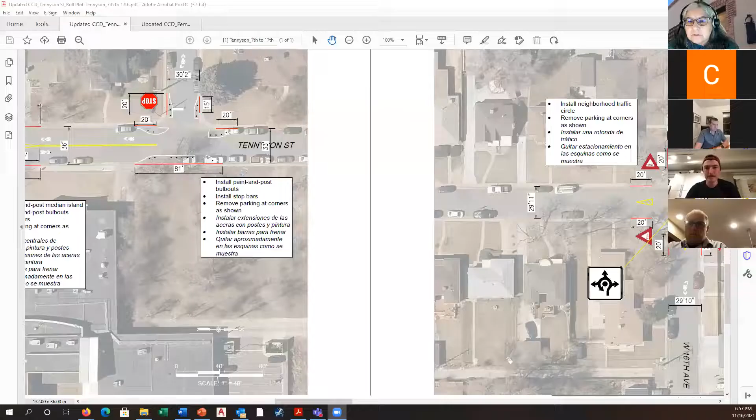I was just wondering, again, in the main room, about the Utica to the Sloan's Lake area, it looks like it feeds into the parking lot. And I think there is some real concerted effort that needs to be looked at in regards to how bikes are intersecting with pedestrians in Sloan's Lake. This plan needs to be conscious of how it feeds into that, because there's a lot of people walking around that walkway, and I think there is conflict between the speeds of bikes and pedestrians walking. So if there's any way to make it more part of the roadway connection versus the walkway, I think that would be an improvement.

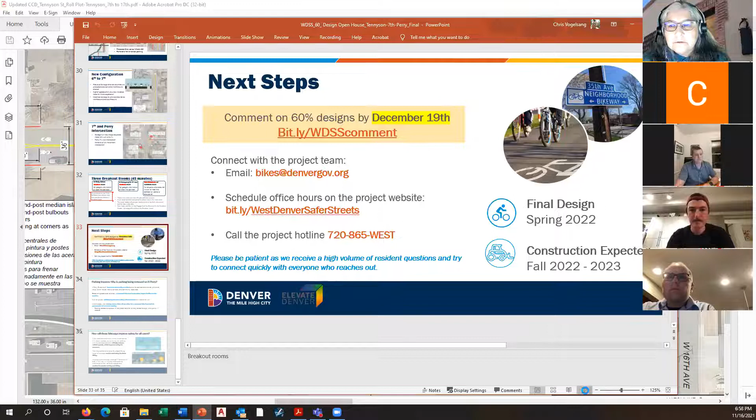I don't know if that's the best place to spill into it. I noticed that Raleigh is also another possible alternative, where I can see it going in with signal lights across Colfax, stop signs at 17th and Raleigh. So there's already some natural traffic stops and traffic flow in that area that might help deal with safety that already exists. So maybe consider that as well.